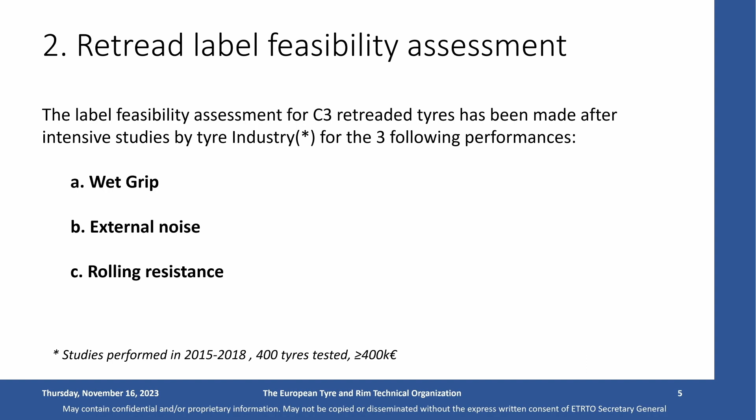When we set the feasibility assessment up, it was very clear that we are not facing any problems with the properties of wet grip or external noise, but we are facing a lot of problems with rolling resistance, because wet grip and rolling noise basically depend on the tread only and the casing itself. So the used tire we are using to produce a new retread has a very large impact.

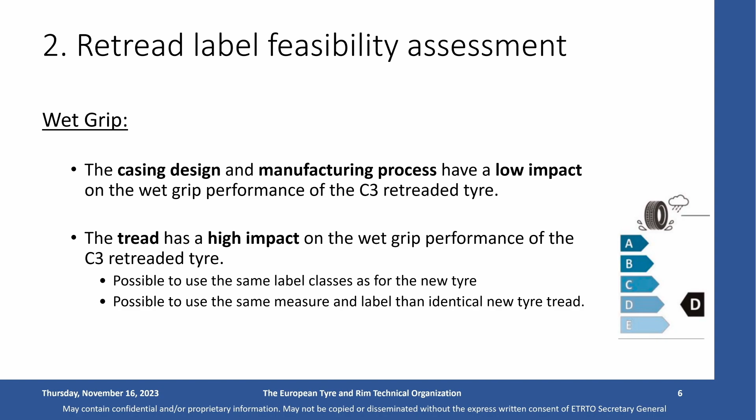For wet grip, we were pretty sure that we keep in line with the structure of the labeling set up for new tires. There's no change needed compared to the labeling classification as it is already set up for wet grip. We can basically stay with it because it's primarily depending on the tread and the used compound itself.

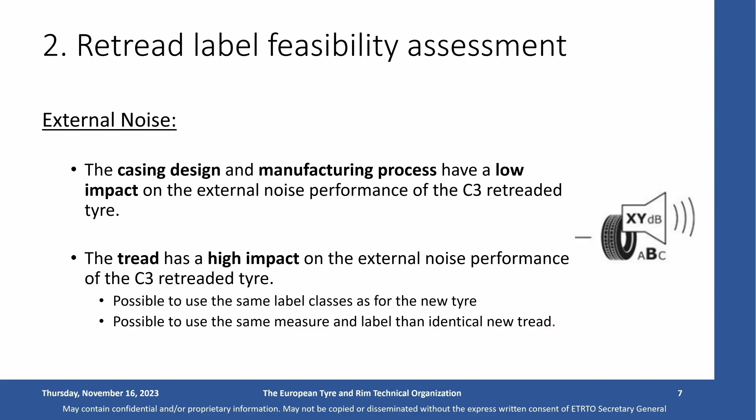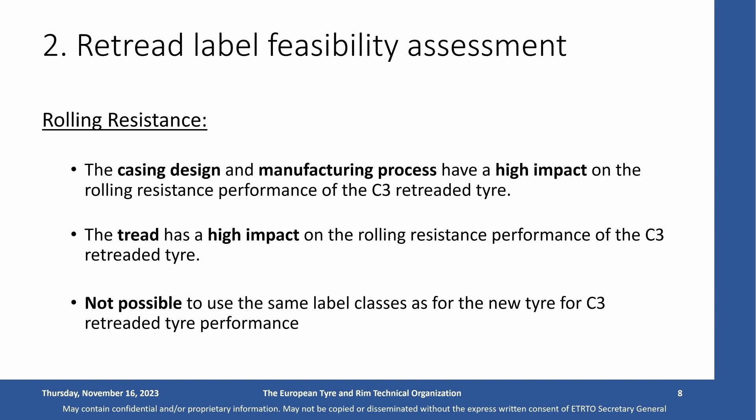The tricky part, as I already mentioned, is the rolling resistance, because the retreader needs one raw material, let's call it like this, the casing, he hasn't got an influence on. And as we found out in recent tests performed by ETRTO, measuring about 300 to 400 different tire sizes and tire brands, there's a huge spread of up to 3 label classes, which is why the rolling resistance labeling system cannot be applied in the same way as it is today for new tires.

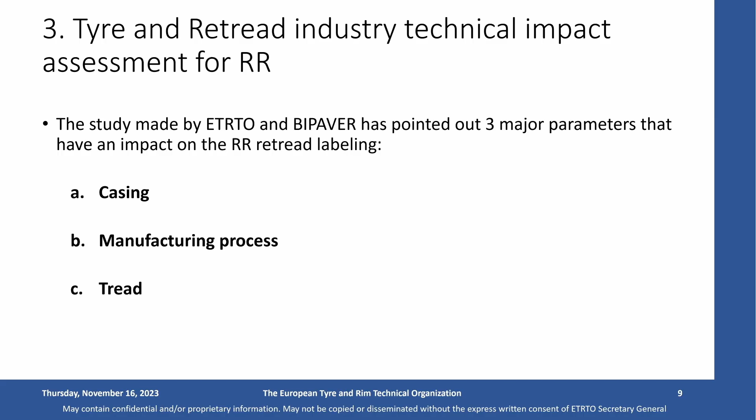If you also put into consideration the influence of variation in the manufacturing process, such as buffing radius, curing temperature, and cushion gauge, there's also an implication that will turn up in the standard deviation, realized at about 0.28 Newton per kilonewton. And if we sum this up in the normal mathematical way, the total standard deviation adds up to about 0.45 Newton per kilonewton.

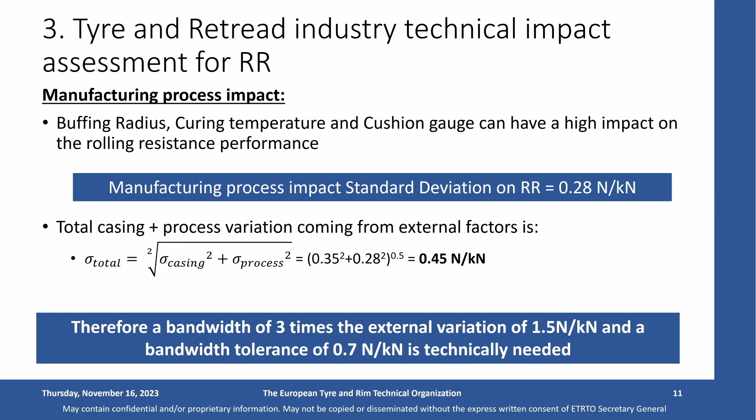Therefore, we needed a bandwidth of the labeling class for rolling resistance of about 3 times the external variation, which turns out to be 1.5 Newton per kilonewton, with a bandwidth tolerance of 0.7 Newton per kilonewton. This is technically needed compared to what you might know as the bandwidth for new tires, which is 1.0 Newton per kilonewton.

So how to deal with it? First, we have to separate the influence of the casing itself, and then we have to manage to measure, in a certain way, the influence of the tread and the process.

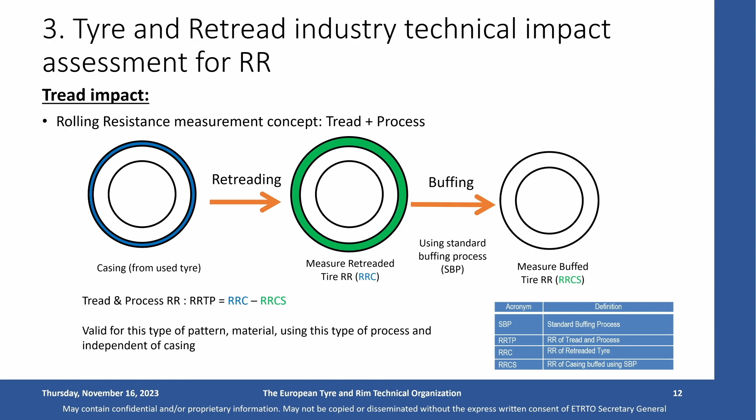This is a schematic where you take a casing from a used tire, you retread it, you measure the retreaded all-over rolling resistance value, then you buff it in a certain defined way, and then you make a deduction of the 2 values to find out what the influence of the tread and the process is.

So compared to wet grip and noise, where we said we can stay in the same labeling schematic as for new tires, for rolling resistance, in our opinion, there's only one possibility: to make the bandwidth of the class a bit wider than it is for new tires.

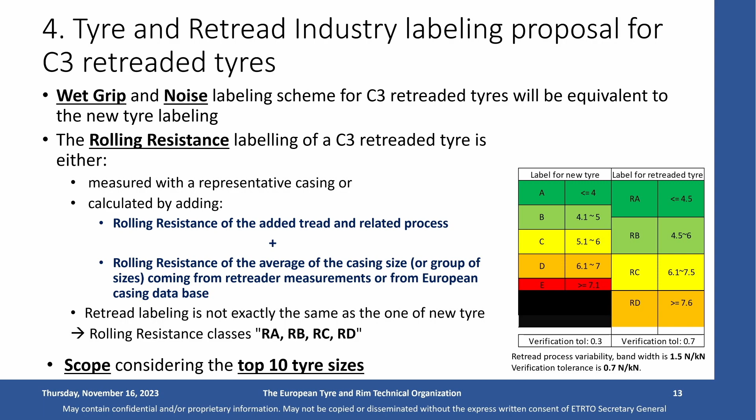Also to reduce the effort and the financial burden generally for the industry, our idea was to focus on the major 10 to 12 tire dimensions in the retreading field in Europe, which represent about 90 to 95% of the overall retreading market. That was basically the contents of our proposal.

We discussed this several times with the Commission, and it's now in a review process. The Commission set out a tender to an independent technical service whose task it was to review our proposal and see whether it's reliable and consistent.

The next step would be to include this labeling scheme by delegated act into the European Labeling Regulation 2020/740. But taking into consideration the time we've needed so far, the time we expect to need until it's really all settled, and the transition periods needed for the industry on the material manufacturer side as well as the retreading side to prepare, I don't personally see it realistic to have a labeling scheme enforced before 2026.

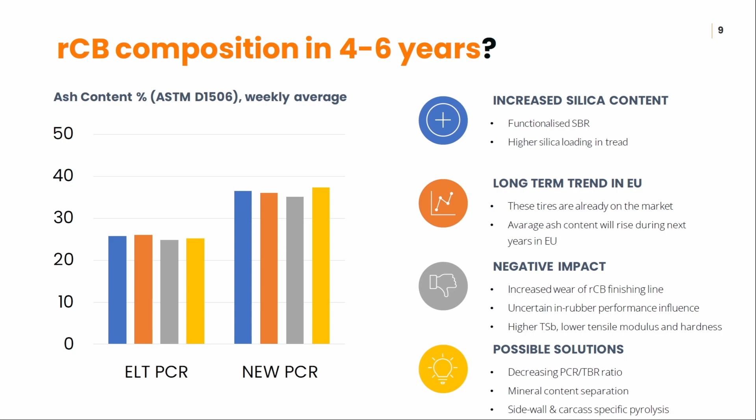This will be a long-term trend in the European Union, and we'll see average ash content rise over the next few years. So it's really difficult to get contracts when you say, okay, in specification we have 25%, but we expect that in 2 years we'll have like 28, and maybe in 6 years, because those tires are already on the road, I'll have like 30 something. This is really difficult.

This also influences the in-rubber performance of recovered carbon black, because right now we are easily in the N660 range, so we're okay for sidewall or inner liner compounding, but not for the tread. If you have much more silica, it will be difficult for even the sidewall to get involved.

So what are the possible solutions? Of course, if you put more TBRs in, there's less silica in the tread, so you could push your pyrolysis with more TBRs, but TBRs should be retreaded — you're all talking about that today, so this is the right way to go with TBRs. Of course, we can try to separate the minerals out of RCB, but this is dangerous and not cost effective. So we chose a different approach.

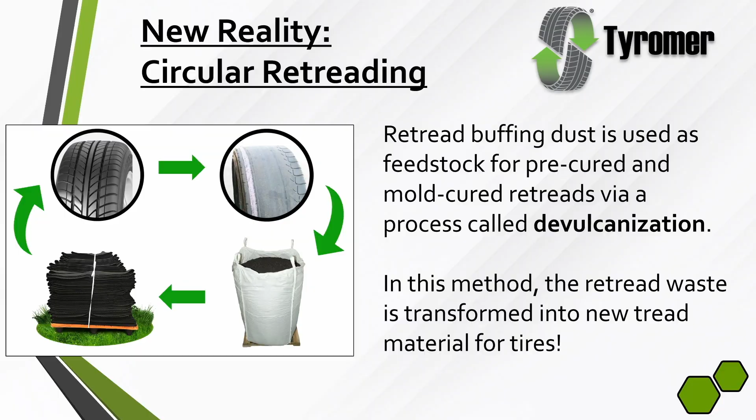What I call circular retreading is basically using the retread buffing dust, or the retread waste, as feedstock for pre-cure and mold cure retreads. We do this through our process called devulcanization. In this method, we're taking the retread buffing, the retread waste, and turning it right back into new retread material. I'm going to describe the steps to go through this.

It's quite straightforward in the sense that we don't change anything in the first step of retreading. Look at standard truck, bus, OTR retreading: the tires are buffed down, meaning the old tread is removed from the tire for the most part, so a new tread can be glued on or molded on. We really use this buffing dust as our feedstock.

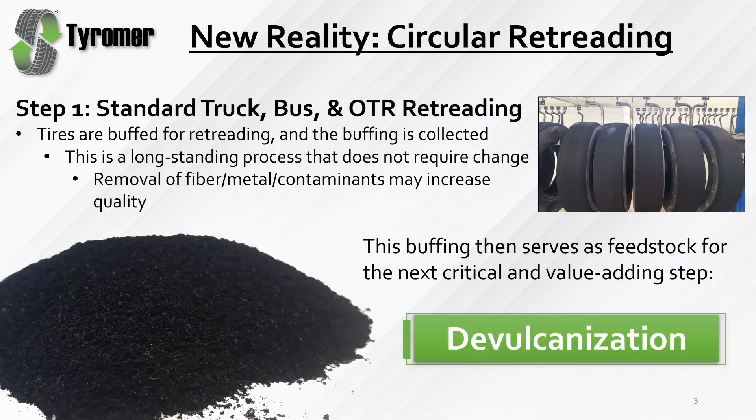I'd like to make it clear that the devulcanization technology works with a large amount of feedstocks. Basically, any material that's been cured with sulfur, we have the potential to devulcanize. But for this particular presentation, we're talking about retread buffing and, again, circular retreading.

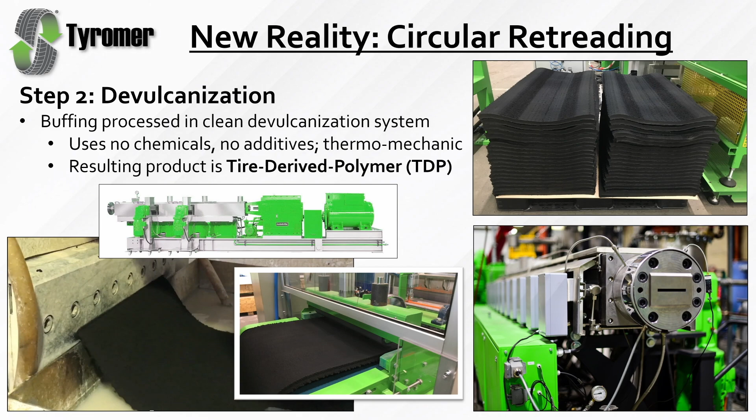So step 2 is really the devulcanization step. After you have this retread buffing waste, it goes through our clean process of devulcanization. Basically, we're using a twin screw extruder. It's a thermomechanical reaction — we actually do not use any chemicals at all. So it's just the retread buffing waste that goes into the machine, and it's this, we call it tire-derived polymer, or TDP, that comes out. Again, there's no chemicals used in our process, no additives. Now, this is a really old video — a 10-year-old video.

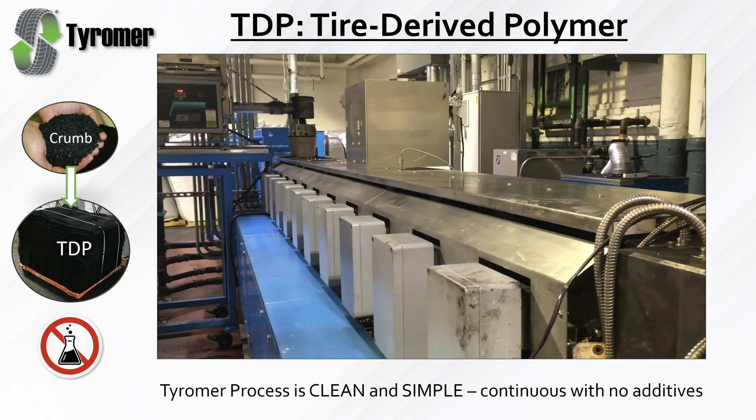You can see the crumb rubber falling into the extruder in the middle there. I like to use this video because it really shows the simplicity of the technology. That was the crumb rubber going in, and this is the devulcanized rubber coming out. That's the whole manufacturing process right there. It's a really simple process.

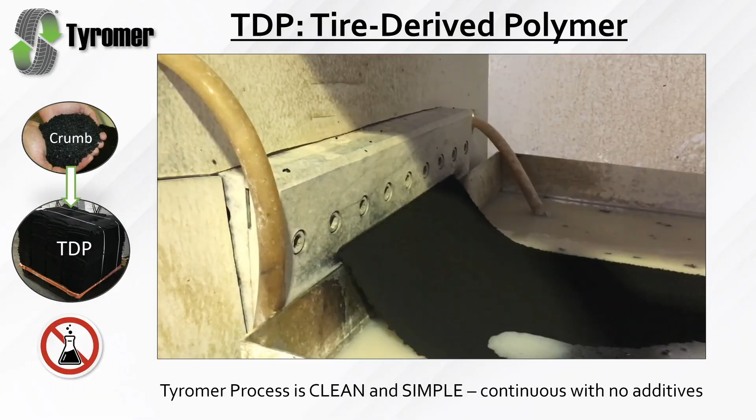Since this video was made about 10 years ago, we've really developed a lot of downstream processing, like automatic packaging, metal detection, weighing and cutting. But the actual devulcanization process, that was it — the crumb rubber goes in, it's a thermomechanical reaction, and this devulcanized rubber is what comes out.

Now, step 3: once we have this devulcanized rubber, what do we do with it? Well, we take it and mix it into a rubber compound. This could be a mold cure or a pre-cured tread.

It's also important to note that our material, because it comes from the retreaded tires, inherently contains about 26 to 27 percent recycled carbon black. So while we talk about our material being recycled rubber, it's really a recycled rubber compound that contains natural rubber, synthetic rubber, and carbon black. Using our material, carbon black as a filler, it's really the vulcanized rubber that gets in the way of reusing that carbon black.

By devulcanizing the rubber, it makes it a lot easier to mix in. And so again, our material is inherently about 26 or 27% recovered carbon black.

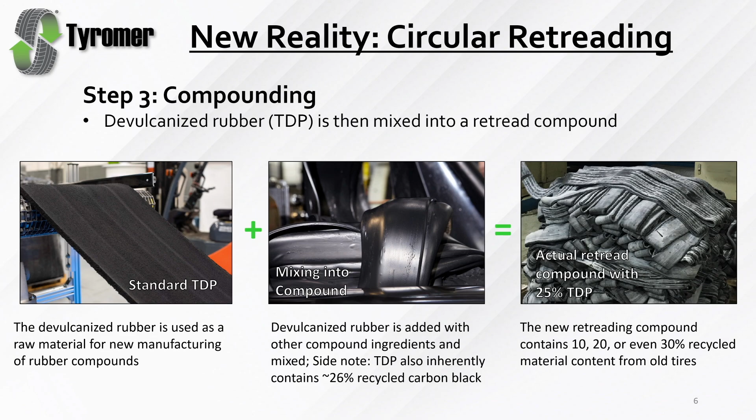From there, we mix it into a retread compound. Again, this could be a pre-cured compound, or a mold cure. In terms of the addition level, we look to add maybe 10, 20, or even 30% recycled content into a new retread. It really depends on the application, but that's the potential here, using 10, 20, or even 30% recycled content in a quality retread that meets industry standards.

So for this application, this is for mold curing. This was actually the first big application that our TDP was used in Canada. There's a big company called Kal Tire. They do a lot of mining services. They've been a partner of ours, and they've been using this OTR retread compound for about 6 years now.

They started with 18% recycled content, and just this year they were actually able to increase the recipe to 25% recycled content. So these tires that you see here are newly retreaded OTR tires with 25% recycled content in them. The recycled content is the rubber compound, basically the rubber and carbon black mixture.

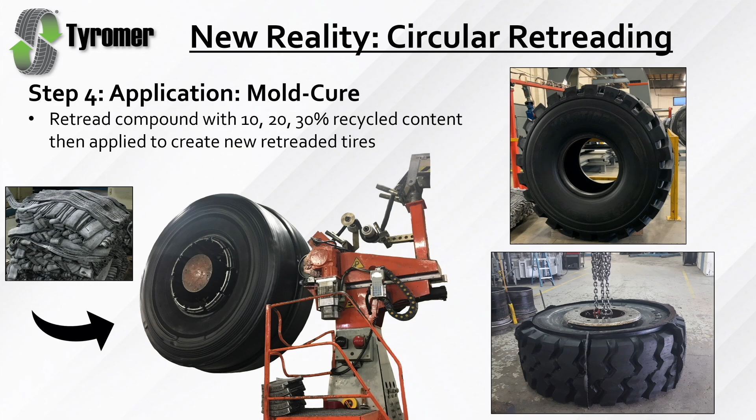Now, we're doing the same thing for pre-cured tread. I'd say the development is maybe a little bit behind because this is just starting to come out now. But it's the exact same method and process.

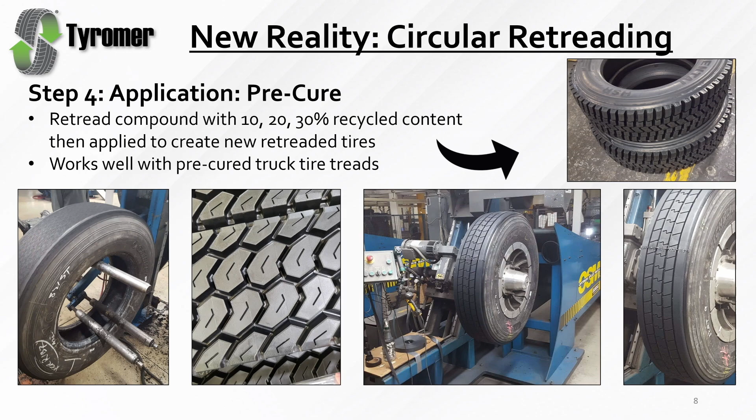So basically, you're making this pre-cured compound, again with 10, 20, 30% recycled compound. But for this application, a pre-cured truck tire tread, we're looking more at that 15% range as probably the optimal level right now. As the tires get larger, we seem to be able to add a little bit more recycled content into it. But for a pre-cured truck tread, we should be targeting 15% recycled rubber compound right now, because this is basically what we've been doing the last few years.

I think a lot of the comments that Krzysztof made in the last presentation make a lot of sense, because we too have been working very closely the last few years on quality control, controlling the feedstock, opening up the market. These concepts are not just related to our technology, but to the tire recycling industry in general. Events like this are great to bring more attention to it and to bring the right minds together.

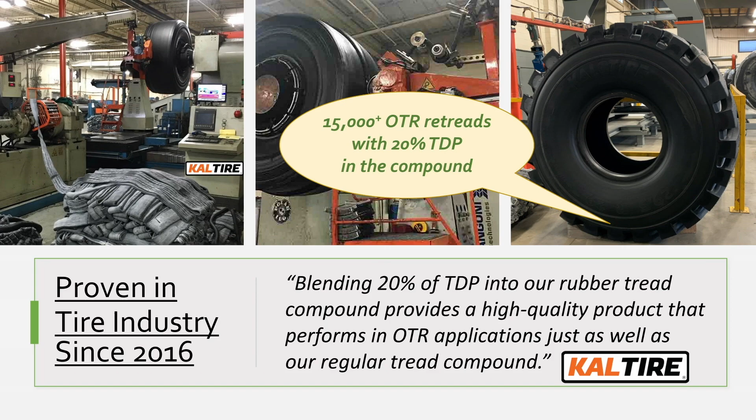This is something we've been doing in Canada since about 2016, and so we can say now over about 15,000 OTR retreads have been made with this compound with 20% recycled material in it. We've quietly been doing this in Canada, but it's been ongoing for about the past 6-7 years now. So again, we've passed about 15,000 OTR retreads with about 20% recycled material content.

A little bit more about this tire-derived polymer. It can really be made from basically any rubber material that's been cured with sulfur. Our most standard is retread buffing. We started with retread buffing because it's very finite in terms of the composition - the truck TBR specifically. It's pretty standard whether you look at the truck tire composition of Europe, North America, or even Asia, they're relatively similar. So we liked retread buffing because it gave us a very narrow range to start with.

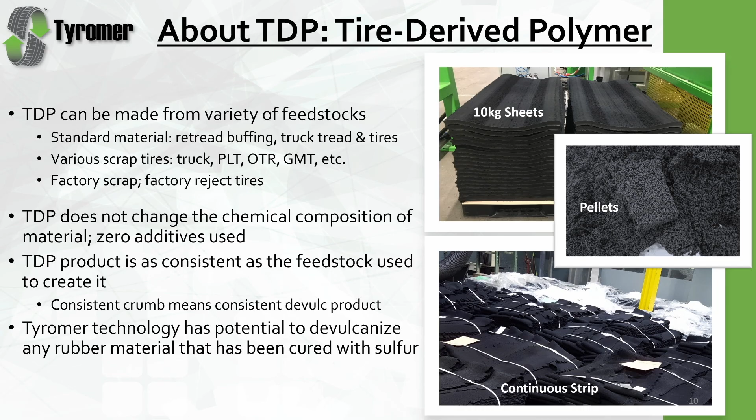But we can also do factory scrap, we can do factory reject tires. The technology has the potential to devulcanize other synthetic materials like EPDM. But right now we're really focusing on retreading, and this is actually the longest standing application that we've been into.

Now, as Krzysztof was mentioning earlier, it is very important to control the feedstock. To be able to supply the tire industry and the tier 1 manufacturers, you really need to have your QA and QC in order. So we have ISO 9001:2015, ISO 14001, and these are really just the start.

Benefits of using tire-derived polymer: we think it significantly reduces the CO2 impact or footprint. If you make TDP instead of making a new tire compound, you will save about 90% of the energy. The devulcanization process is quite simple, as you guys saw. It doesn't have chemicals added, no additives, and the energy efficient process uses about 300 kilowatt hours per metric ton produced. TDP can basically always be sold at a discount compared to natural rubber or carbon black, so it definitely will reduce costs.

We like it because we prefer to produce this locally. The whole point of our technology is to license it and get it out there to where it's needed. If we need this in Italy, we want to put a facility in Italy. If we need this in Australia, we want to put a facility in Australia. The point is to use local material and have a local source - you can use local tires as a local source of rubber. So in places like the United States and Europe where we do not grow rubber, we can still have a source that is largely natural rubber coming from these end-of-life tires.

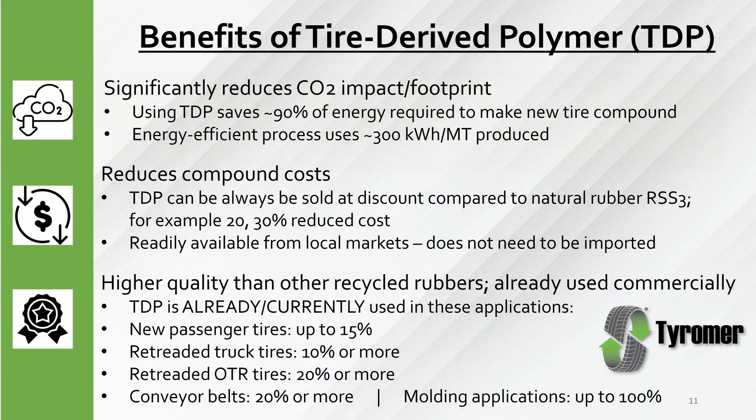This TDP is actually already being used in these applications. It's being used in new passenger tires right now. It's being used in retreaded truck tires, that's pre-cured. It's being used in OTR retreads as mold cure. And it's also being used in some conveyor belt applications. So it's really a versatile material with a lot of potential, and right now we're just trying to get the word out and let people know that this is possible.

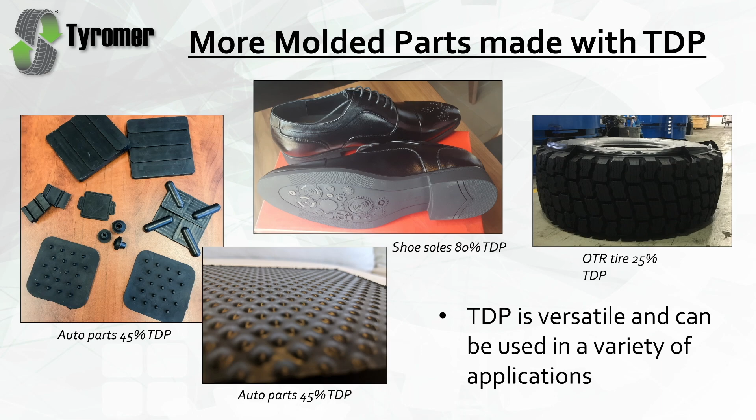Just a little bit about Tyromer Inc. As David said, we're a Canadian company, founded outside of Toronto, in Waterloo, Ontario, about an hour west of Toronto. We are a licensing company, so we want to license the technology - we don't want to be setting up and running all these facilities ourselves. We want to be capitalizing on the strengths of partners and keep our own technical expertise. We're really a technology company, so we like to continue developing the technology, finding ways to increase the properties, and finding ways to make the process more stable.

Right now we have 2 facilities in Canada. We have a facility in Arnhem in the Netherlands. There's a facility coming to Chennai, India next year, early next year, and there's a few more in the planning stages. Hopefully we'll have something in the United States and an additional one in Europe coming soon.

For this audience, I thought it was important to mention what people can do to help right now. A lot of the points Krzysztof made were really spot on in terms of the support we're looking for. For individuals, we want consumers to start requesting recycled material from the tire manufacturers. That will eventually start to change the way they work - if their customers are demanding it, eventually they will change. So that's something individuals and consumers can do.

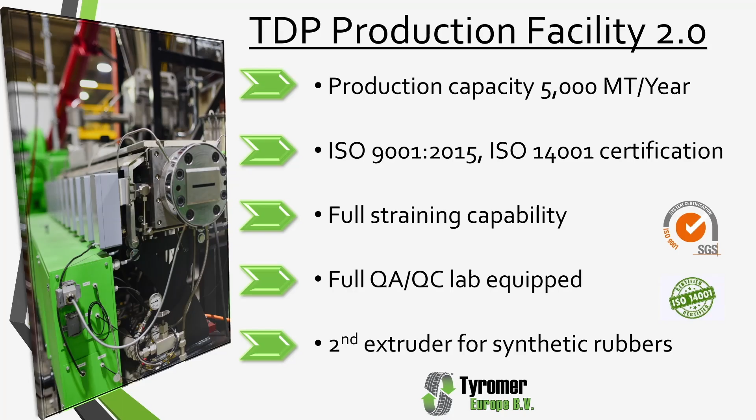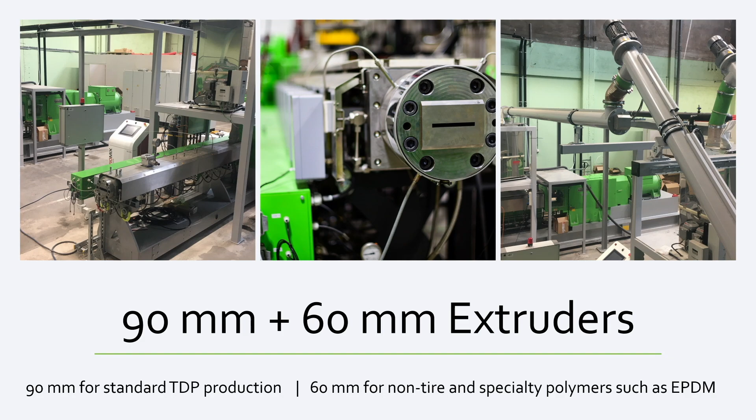We do have 2 ISO certifications. We have full straining capability, which is basically forcing the hot rubber through a fine mesh screen to remove any contaminants. We have metal detection as well, and a full QA/QC lab. We actually have 2 extruders here - our main extruder, the 90, is for our standard tire material, and a smaller extruder, the 60 millimeter, which is good for synthetics, specifically things like EPDM.

Again, we have this full straining capability. This is really important - I don't want to brush past this point. It's really important for quality in the tire industry. Basically, as you go through the crumbing process or get the retread buffing dust, there will be a little bit of contamination, whether it be metal, wood, or stones. There's going to be something in it. So we force the hot rubber through a very fine mesh screen to remove any of those contaminations.

This is a really important point for breaking into the mainstream tire industry and tier 1 manufacturers. While we are doing this in all our operations now, we believe that any recycled rubber going forward is going to need some kind of straining mechanism or quality standard, such as this straining. So we have automatic cooling, drying, and cutting.

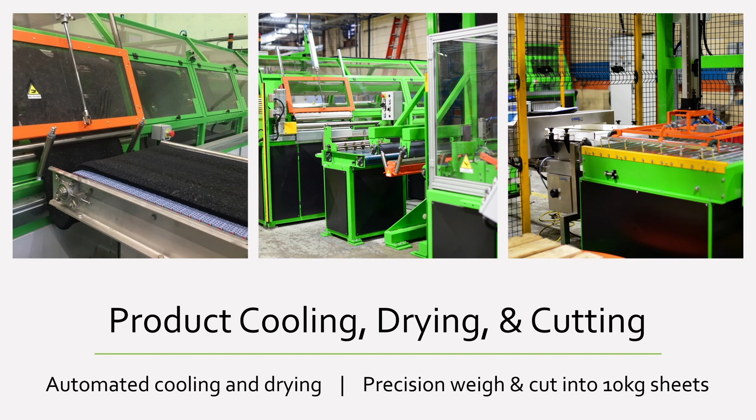Basically, we'll go through a metal detector. It'll weigh out exactly a 10-kilo sheet, plus or minus a couple percent, and then automatically stack the material. We check for metal - this is very important. There's metal checks at the beginning and magnets through the system, but this is one very final check before we stack the material. We check it for metal one last time. Again, quality and tire industry go hand in hand, so this is something we've had to spend a lot of time on in the last few years.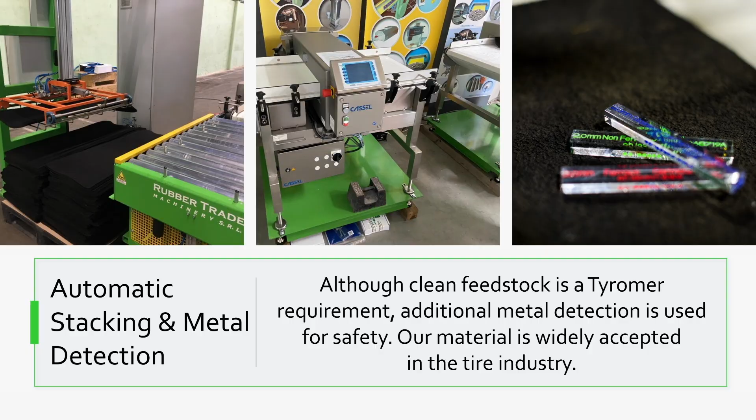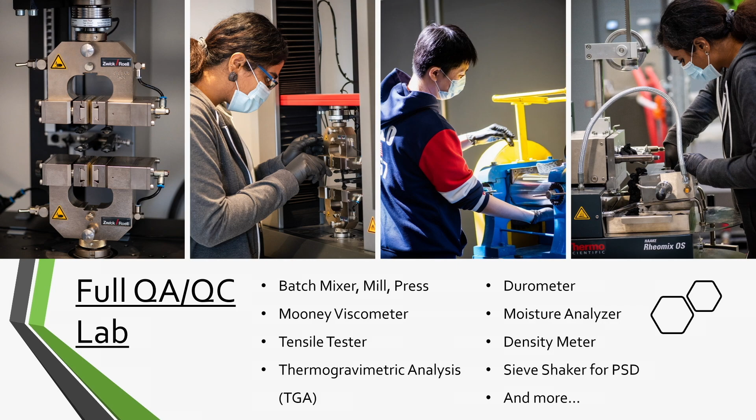Again, a full QA and QC lab. So like any other product, if you order from us, it comes with a certificate of analysis. We can agree on whatever specifications we want together, but we have the full lab to provide it as well.

In conclusion, this concept of circular retreading - it's not just a concept, this is actually happening right now. We're doing this right now, and we feel like we can do this a lot more. I think the support in Europe is particularly good for these kinds of activities. Retreading can really make a difference - we've seen that, and now this takes it a step further by using the own retread waste to go back right into these retreads.

As a licensor of technology, we would love to continue to discuss with partners. So if you have a need for material, or if you're interested to learn more, please come and talk to me. Thank you.

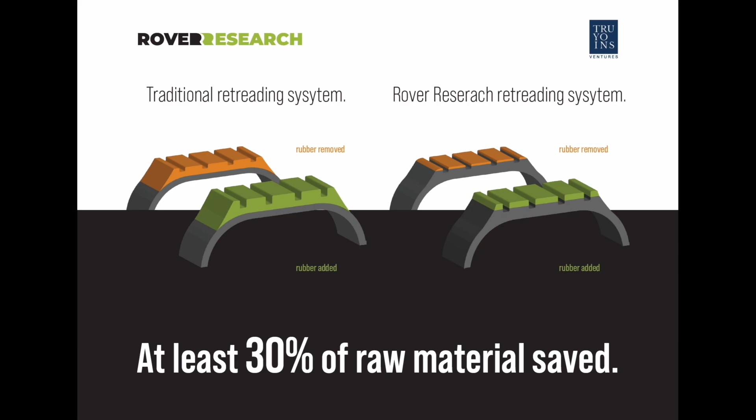And so we can retread with at least 30% of raw material saved. So we save 30% of raw material at least. And you know exactly the cost of the rubber. So what's happened is that using our water jet machine technology, we have created some powder.

And thanks to John for talking before about the rubber and the process that with Tyromer they work. Why? Because, I'm sorry for the gadget... I use this here. Because we have this, here's the powder. This is what happens when we use our water jet. It's dry. And you can use it directly in the retreading of your tire. You don't need anything more.

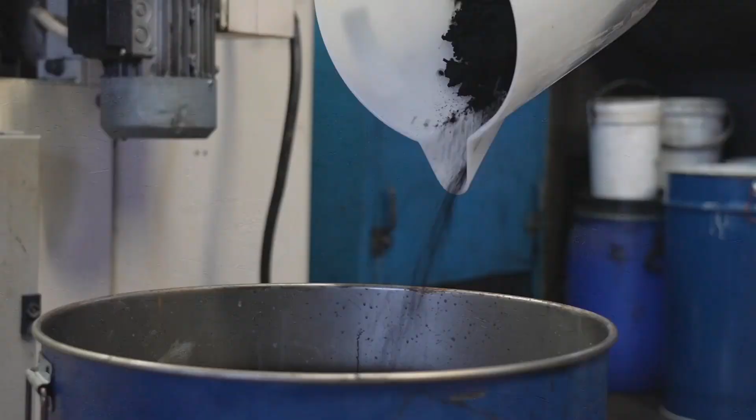So what's happened is we started with the retreading technology, and we discovered that part of this technology can be used also to recycle the same rubber. So with one process, we have also a great secondary raw material, just ready to use. We use today in Italy, in an OTR plant, this type of tire dust at least 15% inside the retreading process. We just developed

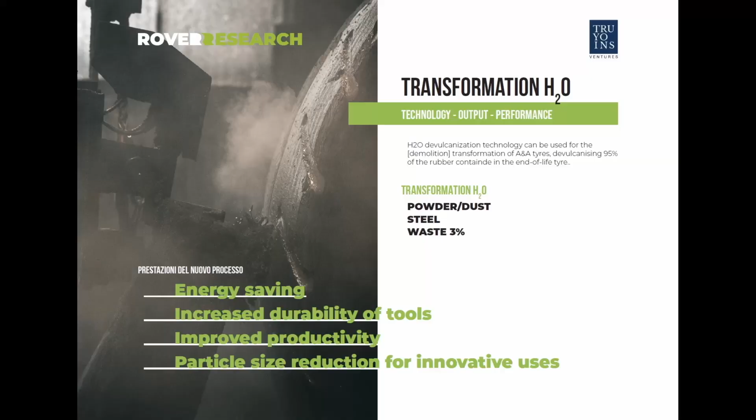The other output is steel. And this can be used to produce new tires without problem. So you can see in our chart what the transformation through H2O produces: powder dust, the tire dust, the steel, and we have 3% waste. But with this type of process, we have energy saving. We can have an increase in durability of the tools, and we can improve the productivity of the plant anyway.

There is some QA and QC that we've done with the Italian certified laboratory, and we are sure that this can be used today. Also, we've used this type of technology, this type of secondary raw material, since 2017 in Italy.

So I think that we have to try different approaches, what we call a second horizon. And I think that in this place, with the different technologies I've seen, there is a lot of great innovation, and I think that we can start the second horizon also in the tire industry with a real circularity.

A real circularity is when the same material is reused in the same sector, not when you use this material to burn, to produce energy or other things. So you have to use the same material in the same sector. This is what we do in the steel recycling process, what we use in the fashion process, and what we want to use in the tire sector. Thank you.

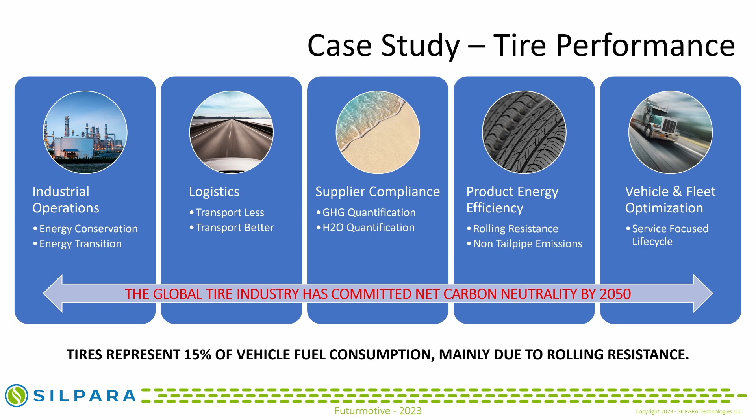The industrial operations are one part of it, the logistics, supplier compliance, but product energy efficiency with the non-tailpipe emissions, as well as through the rolling resistance—those are the keys. So hopefully we all know the magic triangle; we use the magic quadrangle. The magic quadrangle for us is to expand that envelope from 1 to 1+, and to do that at a rate that is just as affordable as the product you have today, if not get some value for that product based on the fact that it has better performance.

So we know in our particular case, we're trying to mix silica with natural rubber. That's probably been the hardest technical barrier for truck and bus tires achieving next-level abrasion and rolling resistance performance. I think that could be agreed upon—at least 98% of the folks we've spoken to and gone to the industry for have told us that's going to be their biggest issue. So what we're trying to do is get silica and natural rubber to play well together.

In order to do that, what we've done is we've created a drop-in process. It does not require any type of reactor to do. It is mixed basically at the source of the natural rubber in the plantation, and requires much less water.

As a matter of fact, folks may or may not know this, but in order to coagulate and dry natural rubber into sheets, each kilo requires 15 liters of water. Our process will take 15 liters of water out of the process. We'll save the water on the back end.

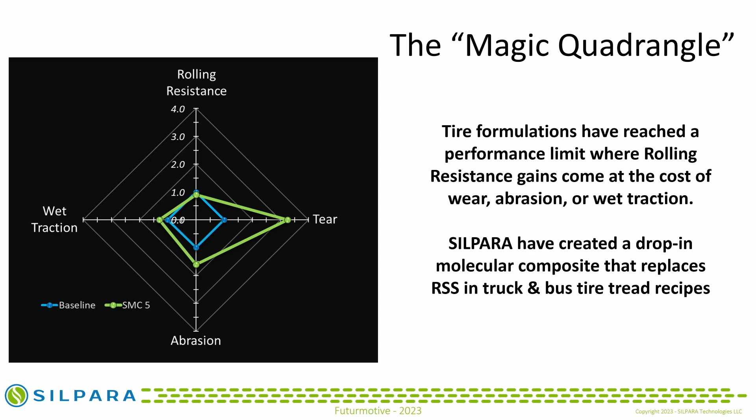As far as the product performance is concerned, we have been able to reach, in certain formulations, parity with rolling resistance. Some formulations were a little bit higher in rolling resistance, up to maybe 20-25%. We're going after the abrasion resistance, which is going to increase the wear component, and our hot tear numbers are looking very, very good. As we focus on wet traction, we want to make sure we're at parity. We're not giving anything up to the customer.

So this is the last slide I will talk to, and I will turn it over to John. But from an overall savings perspective, what we're expecting to get and get paid for, we're not going to get paid for it the traditional way. We're going to get paid for it through performance. Our solution provides a lot of innovation when it comes to the problem that we've gone out to focus on.

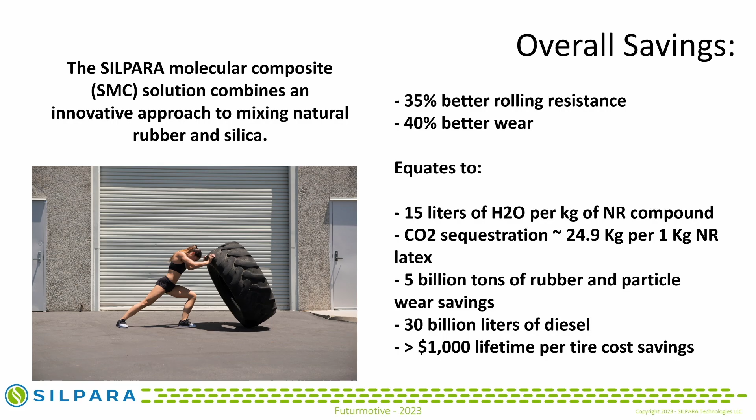You can look at the numbers there. It's a gigantic opportunity for the industry to go after. Looking at it from front to back in the ecosystem has been our approach. John's going to talk a little bit about the savings that we're looking at and where we're going from an environmental perspective. But hopefully, at the end of the day, what you've taken away here is that as an industry, we've got to innovate. We can't greenwash. We've got to go after real problems and solve them with real technology. I thank you for your time. I'll turn it over to John.

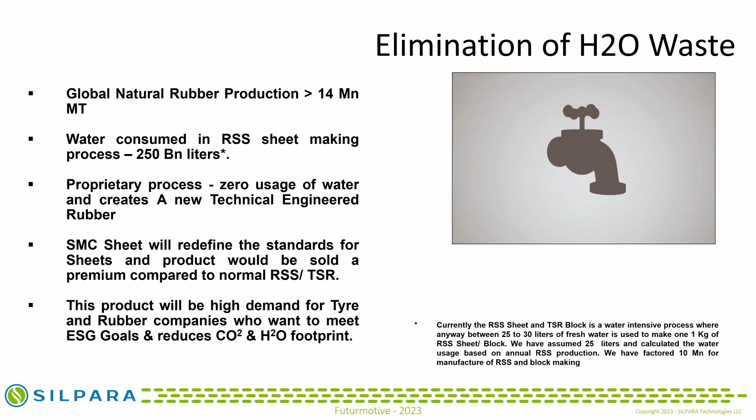So I just wanted to give you an idea as to if we happen to use the low rolling resistant compound, what could we save? So I just took an obscure small country called Sri Lanka, a very small distance to travel, truck population of under 500,000, and if we just assume half of them would be eligible to put this in place, and at 4% saving, we are looking to save about $50 million.

Now, translate that into Europe. So these are things which can be, where you can actually measure. We have a gentleman talk about how we can do tire data measurement. This is very easy. You can actually measure the carbon footprint that you're going to save, the water footprint. It's going to be a game changer.

I think the question I want to just leave with the audience at this point of time is, are we ready to so-called modify or recreate rolling resistance standard across the world? Because that will start reducing tailpipe emission. For instance, the EU is talking about microplastics infill bans. That's very nice, but honestly, is that going to make a real impact? No. These are areas where they should be focusing on.

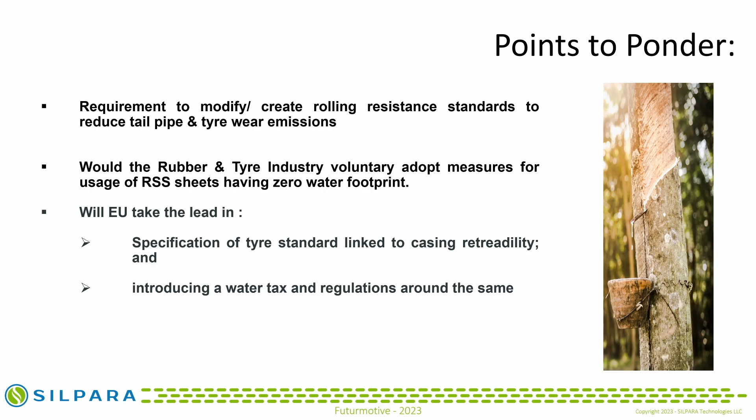Second is, from the rubber and tire industry, while we can say 2030, 2050, I can tell you by the time things move on, they will make it 2100 and say that's when we're going to be sustainable. They'll start pushing that. Will they voluntarily adopt these standards? And will the EU, as such, take the lead in saying, can we have specifications for tire standards linked to casing retreadability, so that we actually move away from single-use tires, and introduce a water tax in addition to a carbon tax and put regulations around that? Then you're going to have more teeth behind the regulations.

That's it. Thank you all for patient listening.